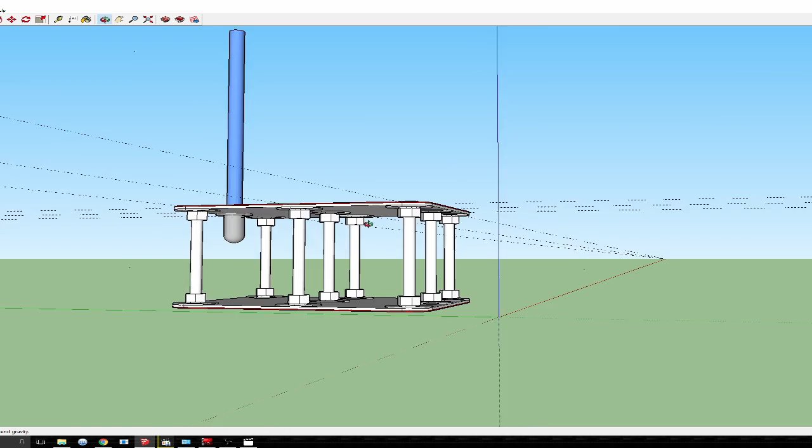Hello, Randy here, and today we're going to talk about the easy style stair step that I built for the Tetra Society of North America.

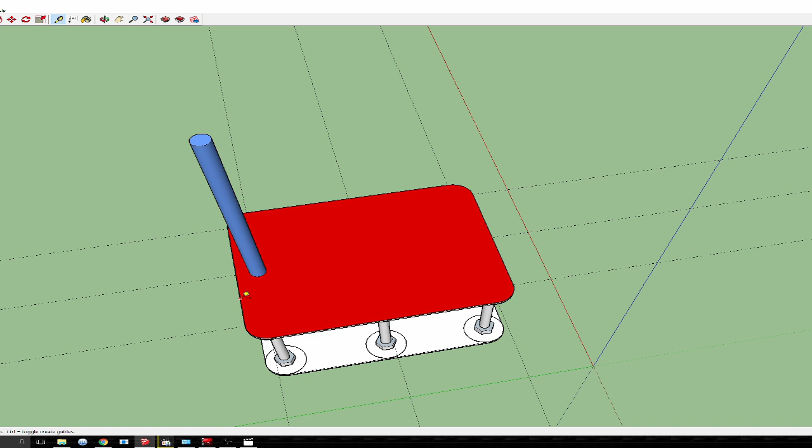The Tetra Society is a society that makes assistive devices for people who have disabilities. What I made here is a step that is 6 inches tall. I'll show you right here with the measuring tape. Well, this is 6 1/8 because of the rubber on the top and the bottom. 6 inches tall by 1 foot long by 9 inches wide.

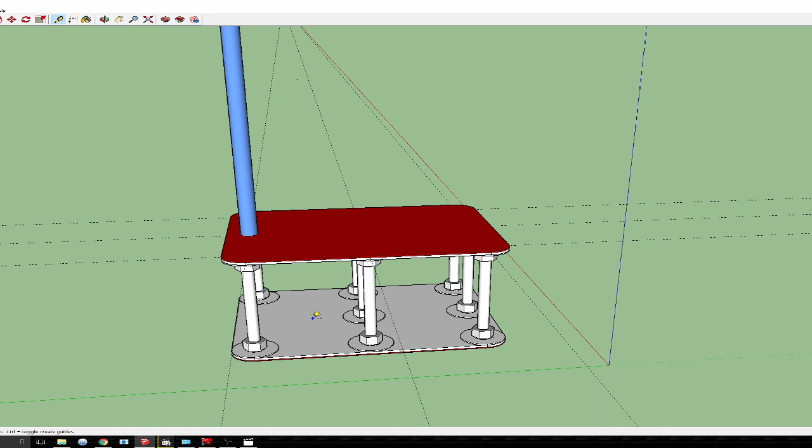The point of this step is to allow the client that I was working for through the Tetra Society to climb in and out of the pool in her condo residence. The pool has 1 foot deep steps, which are quite significant and difficult to navigate for a person with limited mobility. So this step allows the step to be divided into 2 effectively. She can step onto the step and then step off of it and make her way down the steps with greater ease than if she didn't have this device.

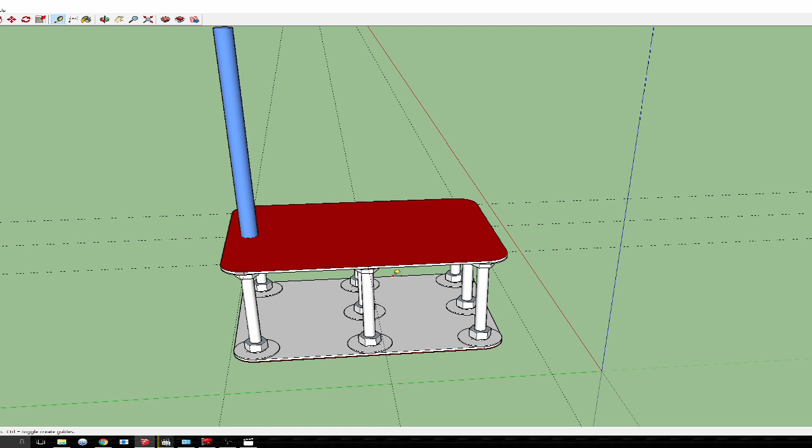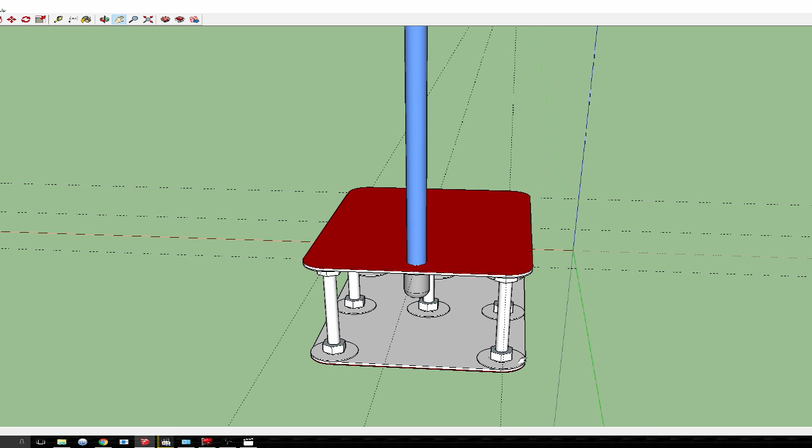I began the design process for this step by visiting the client. I went to her home and took measurements of the stairs in her house and the stairs of the pool. I took those measurements into account when designing this piece so that it would be wide enough to get a good stable base, but not so wide that it would hang over the edge of the step.

I also had to take into account the fact that since it was going into a pool, it should only be made out of materials which are waterproof and corrosion proof, which limited me to galvanized steel and plastics, essentially.

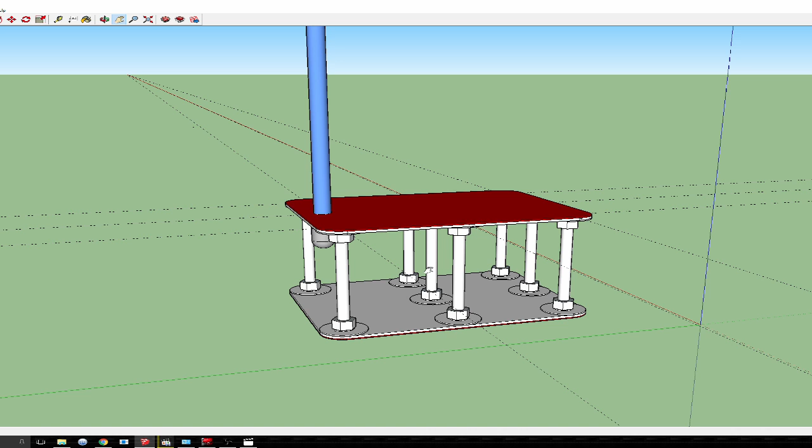Another consideration in the design is how the client wanted to carry the device. She wanted to carry the device via a cane. This cane would place the step in front of her as though it were a quad cane or similar apparatus, but the step itself could then be walked upon.

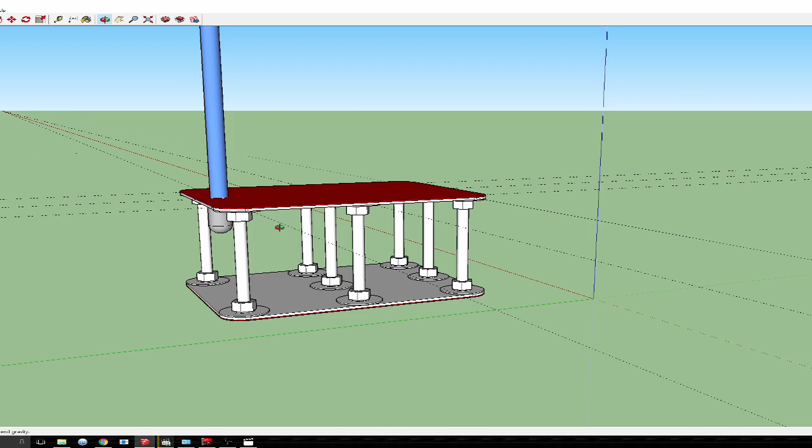The step also had to be non-buoyant, which means I used high-density polyethylene, a non-buoyant plastic, and steel supports, which are also non-buoyant. If I had used anything else, the design would not have worked. The specifications also mandated that there could not be any trapped air, because that would also cause issues with buoyancy and instability when placed in water.

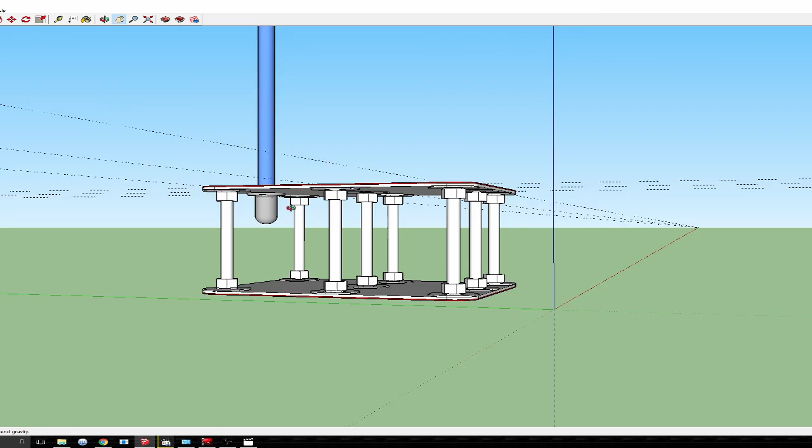And so, the end result is an open design in which water and air can easily pass through, and yet it's still very rigid and quite strong, that can be carried by a cane and is made out of materials that are durable.

The 3D model allowed me to work out my sketches in a 3-dimensional space, allowing me to get a better image of how the final assembly would look.

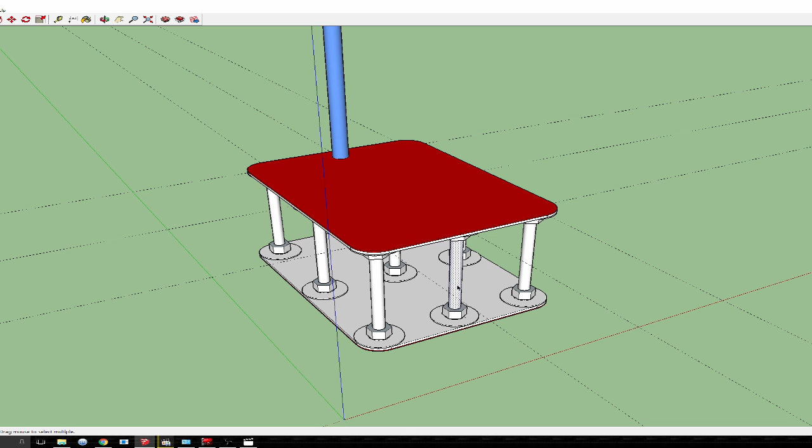A notable change from the original design is the absence of this 8th column. When I sourced the HDPE plastic, I found a good, cheap source in plastic cutting boards, which had handles in the top. Those handles were right in the place of where this column would be. So instead of the column, there's a handle, which I think provides useful functionality.

The first major build step is layout. Here, I scribe lines on the piece of plastic with a scribe and a rule. Then, I take a black pen to fill in those scribed lines so I can see them on the drill press.

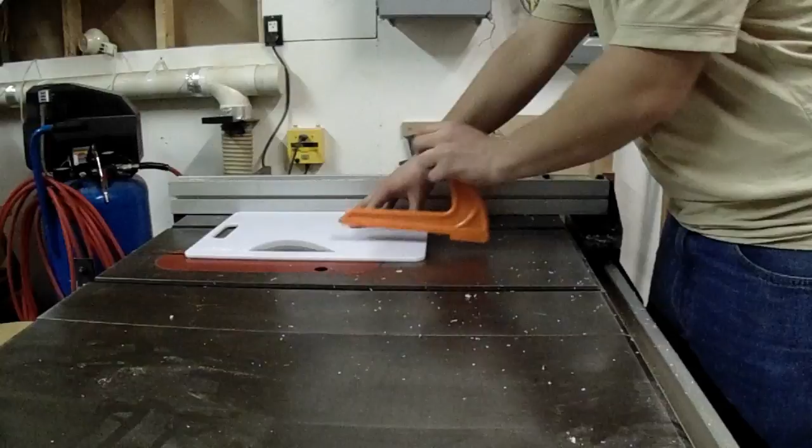Next, I cut down a few inches off the side of the cutting board, down to the size in the SketchUp drawing. Next, I cut off all 4 corners of the plastic cutting board, and then take that cutting board to the sander and round those corners so that they're nice and smooth to the touch.

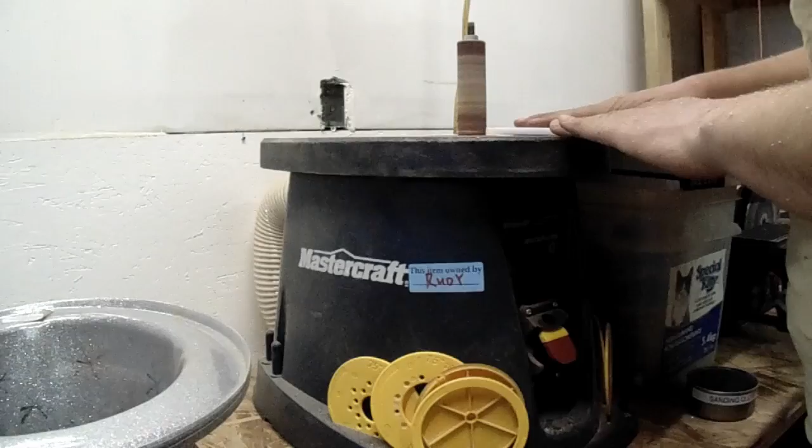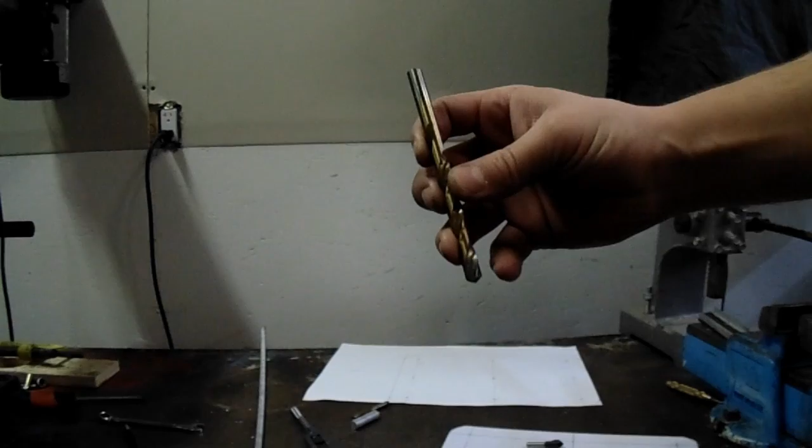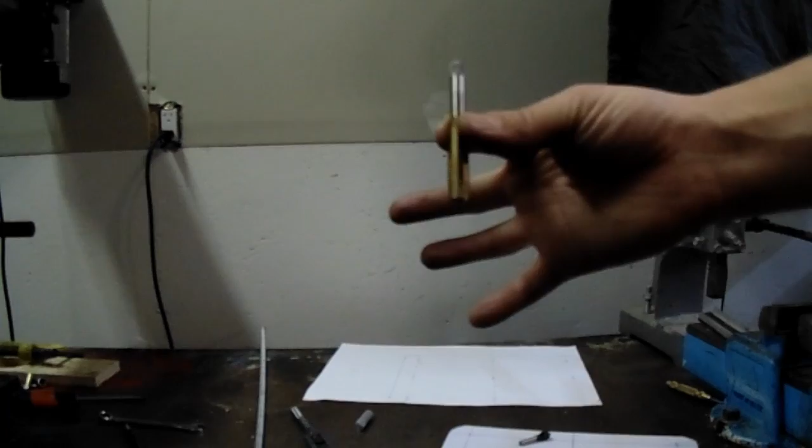Next, we go to the drill press. We will use the layout, done earlier, to drill and tap the 7 holes required for the 5/16 threaded rod. First, we'll use a combination drill countersink. Then we'll follow with a 5/16 drill. Then we'll countersink those holes so that we can tap them. I'll use a tap wrench to drive the tap, and a point in the drill chuck to center it.

Now, on the drill press, we center drill with a combination drill countersink for a pilot indentation for our 5/16 drill bit, which then drills the main hole. Next, we clean up that hole's top with the countersink so that we have a good bearing surface for the tap.

And when we do the tap, you will see that I back off a little bit. I reverse rotation to break chips. That may seem silly in a plastic, but I believe even in plastic, chips can cause deformation of the thread because of how soft the plastic is.

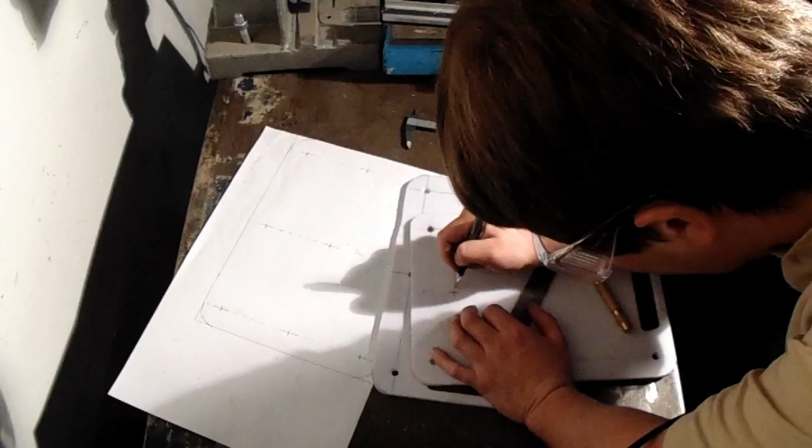Next, I lay out the holes for the flange that will be attached to the top plastic board for holding the cane.

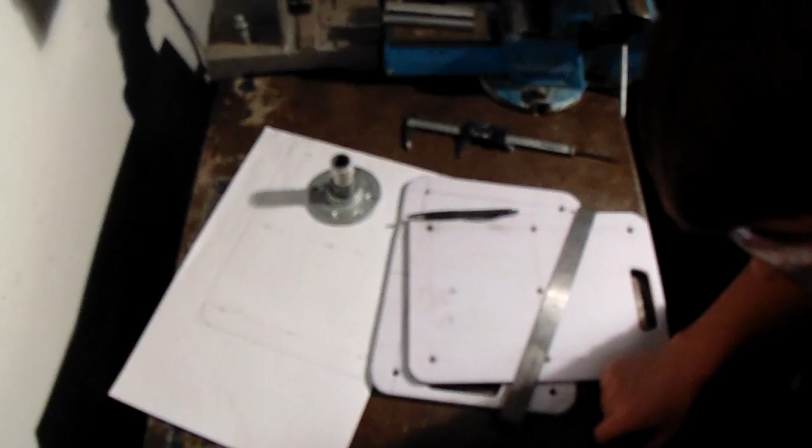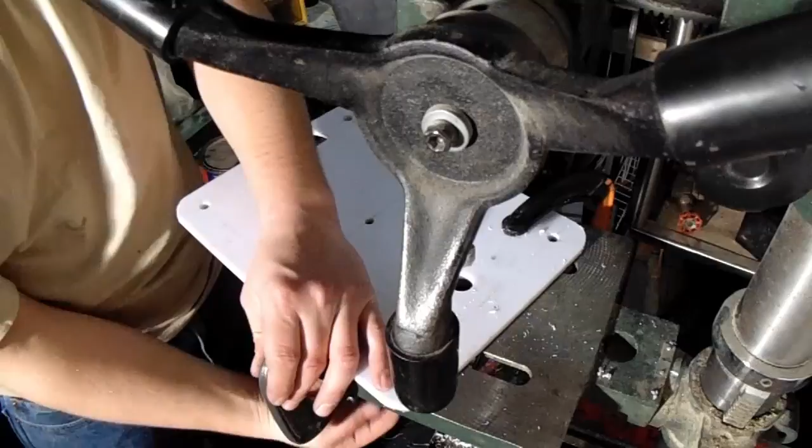Now I drill the hole at the center of the pipe flange, and then I drill the holes around the periphery for the bolts that will go in and secure the pipe flange to the plastic board.

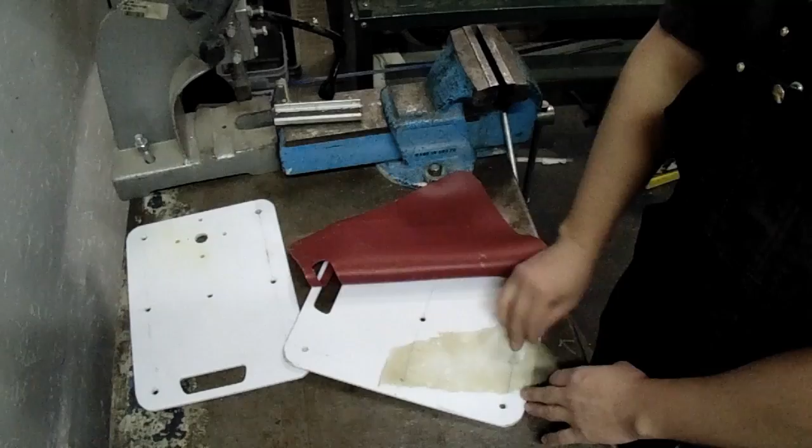I tried gluing the silicone to the HDPE plastic. That did not work, so I then moved on to mechanical fasteners.

For those fasteners, I drilled 1/8 inch holes to accommodate panhead bolts. I also counterbored the holes so that the panheads could be sunk below the surface of the plastic board, so that the heads would not scrape on the floor or on the client's feet when in use.

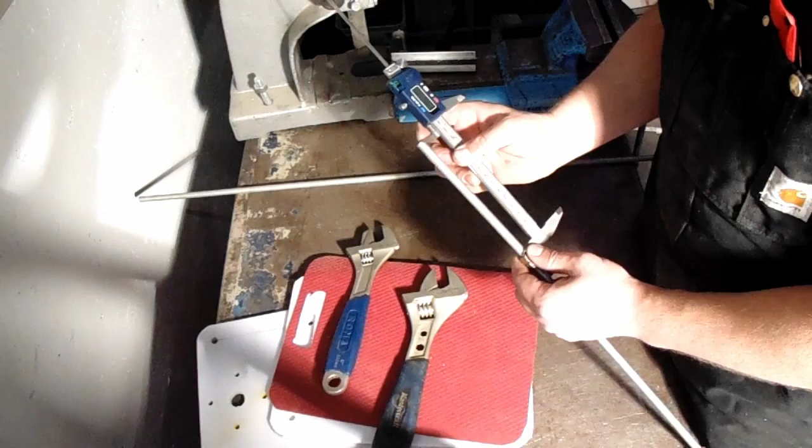Now we're going to cut the threaded rods used in assembly. To do that, we use a double nut and some calipers to measure out the length of threaded rod we need. Then we tighten that double nut, check the measurement again, and cut at the face of those double nuts.

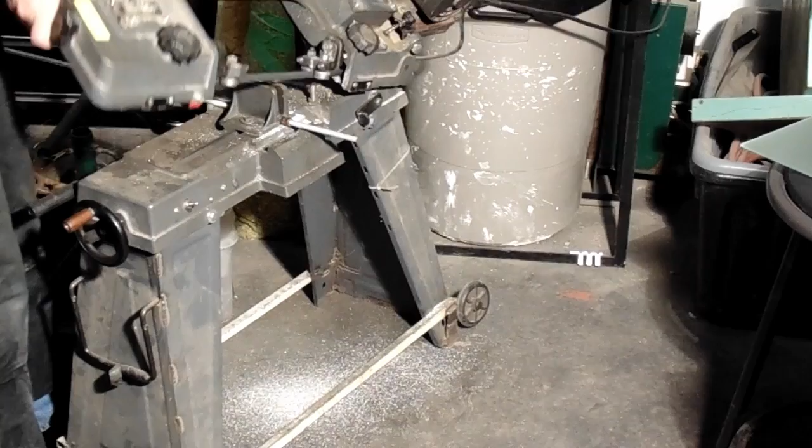Here it is on the horizontal bandsaw. After cutting, we will also paint the threaded rods to prevent them from rusting. However, this I did off camera.

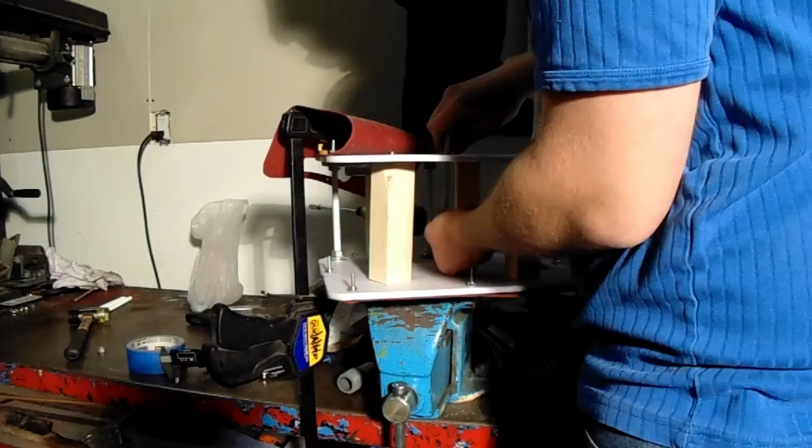Now we can move on to the final assembly. This is done by taking 4 pieces of wood and cutting them exactly to the length required to get 6 inches between the 2 plastic boards, then clamping upon the 2 plastic boards so that we can now move on to threading the threaded rod through the threaded hole in the top plastic board.

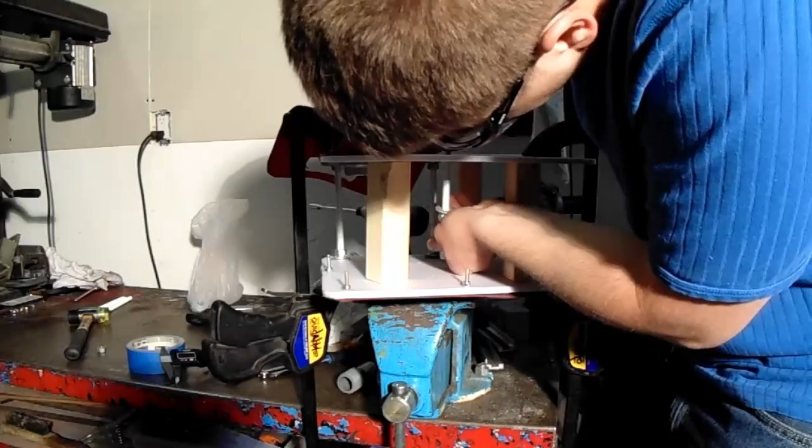As you do this, it is important to remember to thread on the 3/8 nuts and washers that are required in the final assembly. These nuts and washers provide a great deal of stability to the entire assembly.

After getting on those nuts and washers, you can continue to thread the threaded rod into the bottom threaded hole. At this point, I check the measurement from the end of the threaded rod to the surface of the plastic board. I cut the threaded rod slightly less than 6 inches, so this measurement should be around 50 thousandths of an inch.

Once satisfied, tighten the nuts by hand, and then come around with a wrench and tighten 1/4 turn further.

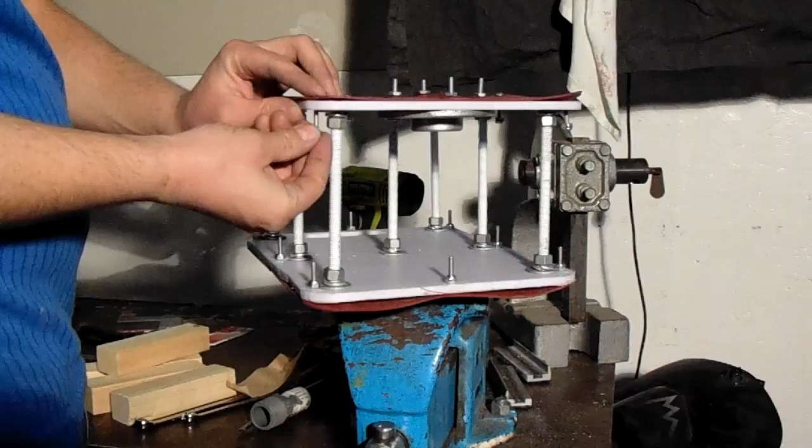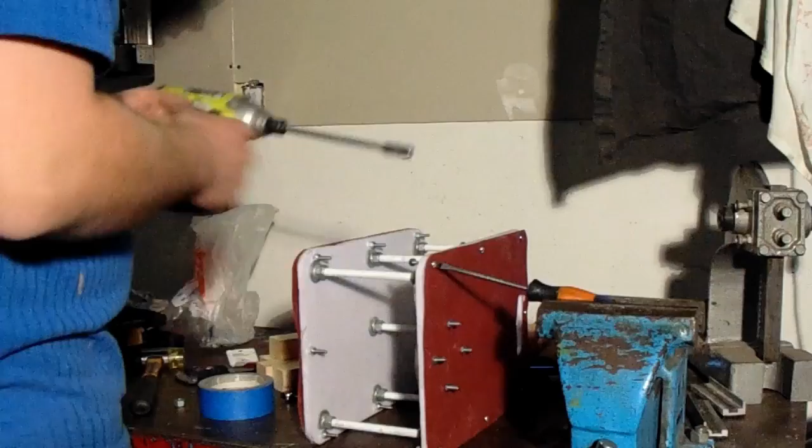It is at this point that I recommend you attach the rubber to the plastic board. It was attached in this video earlier, however it became quite cumbersome in the final assembly to have the rubber in the way. Therefore, I suggest you attach it now, once the final assembly is done.

You can also attach the bolts that hold on the pipe flange on the bottom of the top plastic board.

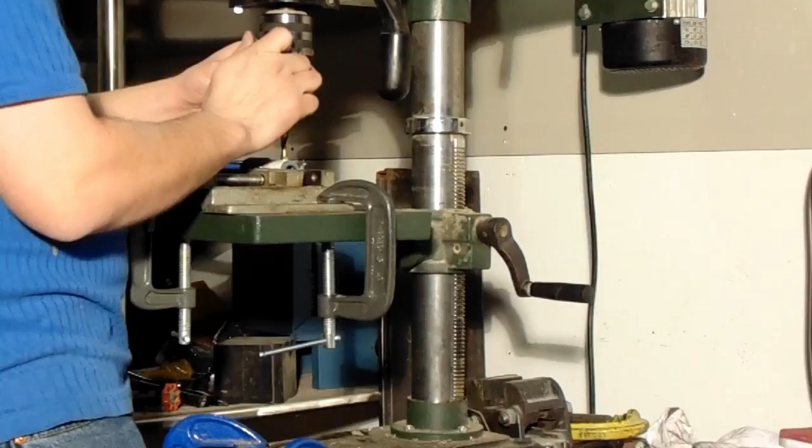We can now drill the hole through the pipe nipple and through the cane. This hole will allow us to fasten a pin through the pipe nipple. This will allow us to attach the base of the cane to the cane itself.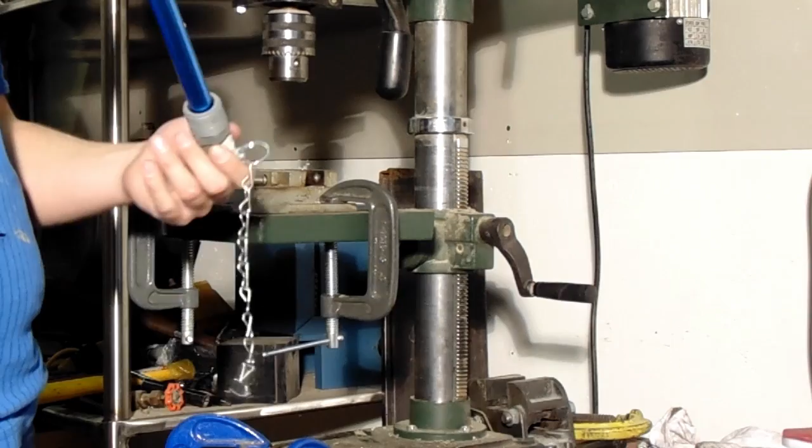I used a 1/4 inch pin, and so I drilled a 1/4 inch hole. The nice part about the pin is that it's a very secure fastener that also is easy to remove. So the whole assembly doesn't have to be the size of the cane. It can just be the step.

Now I take a modeling knife and I cut a hole in the silicone rubber so that I can insert the cane shaft. Then I align the pipe nipple with the side of the step so that the pin can be assembled through the pipe nipple and through the cane shaft.

Then I attach the chain from the pin to one of the bolts from the flange. Then I cut off the bolts to length.

Here you can see me testing out the product. It worked very well. It was very strong in the vertical direction. However, I became concerned about side loading. As people rocked back and forth on top of the stool, I assumed that the threads, the plastic threads, would wear out, causing a lot of slop.

And so what I did to address that issue was I attached guy wires going from either corner so that the horizontal forces were also braced against.